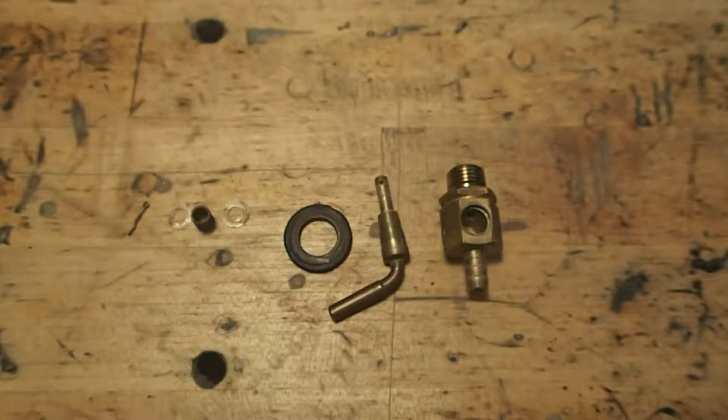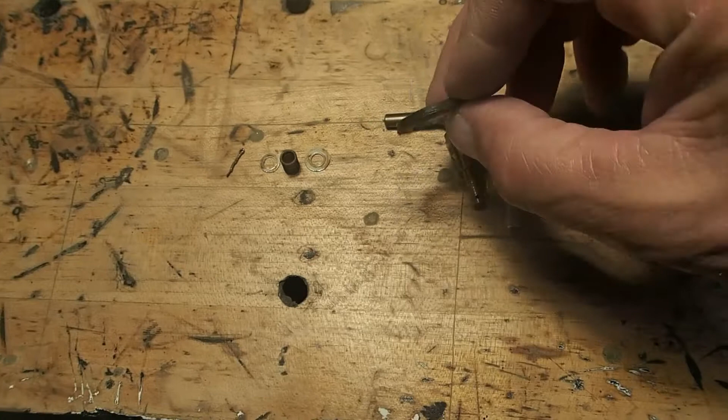I'm at this point where I've pulled the petcock out, or one of them. They both need replaced, they're both leaking right where this piece goes in, and there's no rubber seal there at all, just brass on brass it looks like. This washer is fine, it's not leaking, it's just leaking out of here.

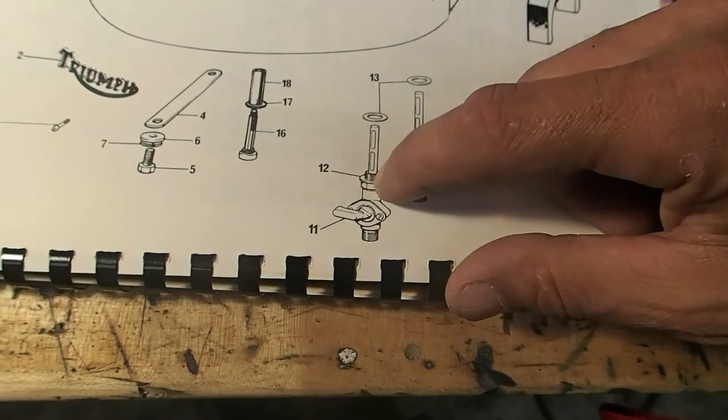So I'm trying to find a replacement for this and not having any luck, mainly because this threaded end goes into the tank, and then this hose adapter goes into the carb. Well, in the manual, the parts have the same thing, thread adapters going up into the tank, but they also have threads on the bottom. Everything I've found online so far has threads on the bottom, not the hose adapter.

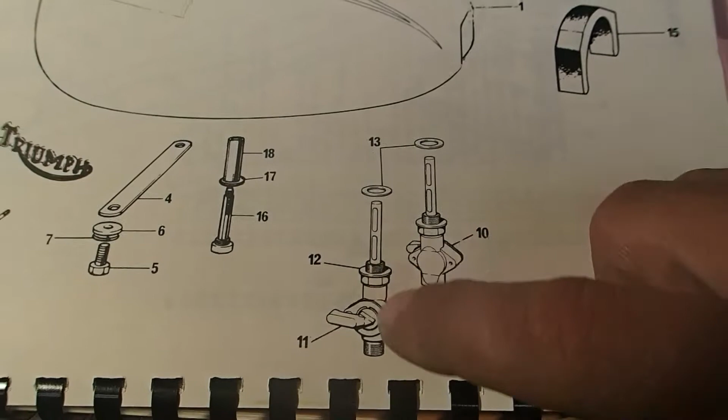I'm not quite sure what to do. I've looked around and found one set that actually had threads on the top and a hose adapter on the bottom, but it had a big nut that covered up the threads, so it looked like it screwed onto something already threaded on the gas tank - exterior threads instead of interior threads like this one. It was basically the reverse, like it screwed up onto something.

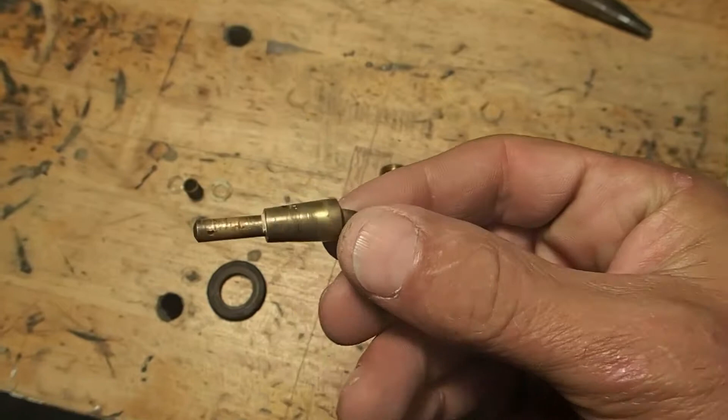So I'm having trouble figuring out what to do because I don't know. I mean, they're just bad. You can see they're all marked up and scarred up, and that's why they're leaking, obviously.

Do I take sandpaper to them and try to smooth them out maybe? I may be able to get that one pretty easily, but I don't think I'd ever be able to get the inside of this smoothed out well.

So I don't know, I'm in a quandary, and I'm doing some research right now on the web. I've already asked T140d.com and we'll see what they say. But yeah, I just don't know what petcocks to get. I need to buy them - that's my next step, is to replace these.

There's two on the T140. There's a primary, which is the one I just took off, on the left hand side of the bike, and then there's also one on the right hand side, which is a reserve, and they look identical. So there wasn't a reason for me to pull both off - they're both leaking in the same place.

So if you can see, this is all - I've disassembled the entire petcock. This is the cotter pin that goes in the end of this, into that little hole right there. Then the washer goes on.

Let me see if I can just assemble it for you real quick, maybe that'll be easier. So this goes in here, then you put the big washer on, then your spring, then your little washer, and then the cotter pin will go in that hole there.

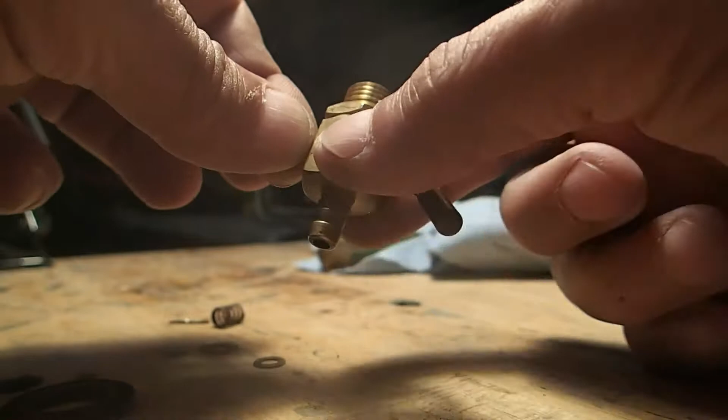So that basically keeps tension on it and pulls it this way and keeps it together. It kind of pulls this way and the centerpiece this way, kind of like this. And that's supposed to keep it sealed.

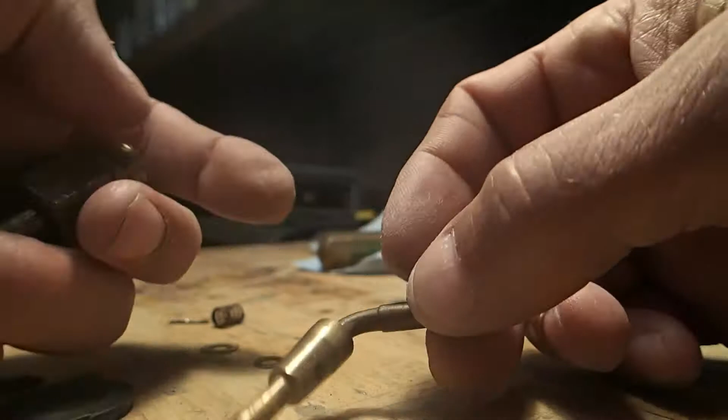Well, just look at that - you can tell it's not sealing well at all. You can see nicks in it and everything. And then the washer goes here up against the gas tank, kind of like that.

So yeah, that's what I'm working on now - I don't have a way to tell which petcock... anyway, I'm trying to figure out which petcocks to get.

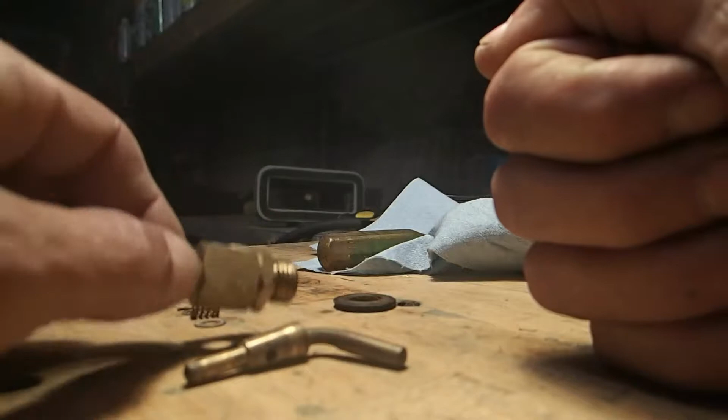So if anybody has any ideas or suggestions, please let me know, because these are not good. I can't ride the bike like this. I did today, but I was leaking gas everywhere, so I don't want to be doing that forever. So I need new petcocks.

Remember, this is the one that they said it needed, and as you can see, it's got threads at the bottom and threads at the top. So that's not these, which is the one I took off.

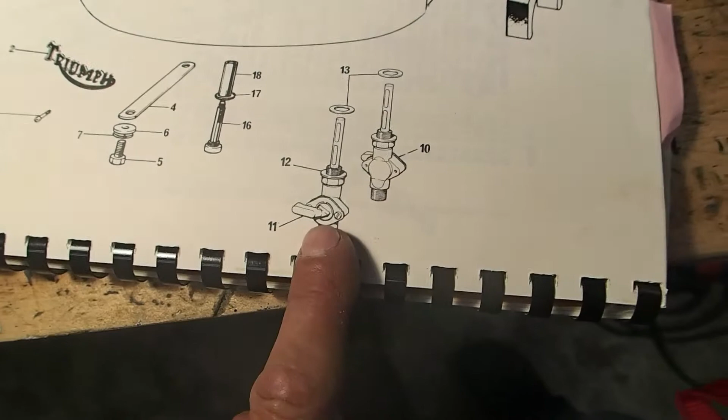I don't know if they're original, if somebody took the originals off and put these on or not, but all I know is these are leaking. They don't match what this says should be the original, and I would love to have that filter. See, this one even has a filter on it, and this one doesn't. So I would love to have that filter.

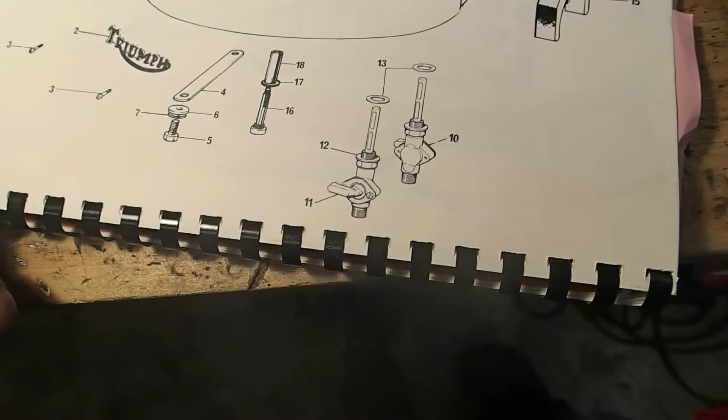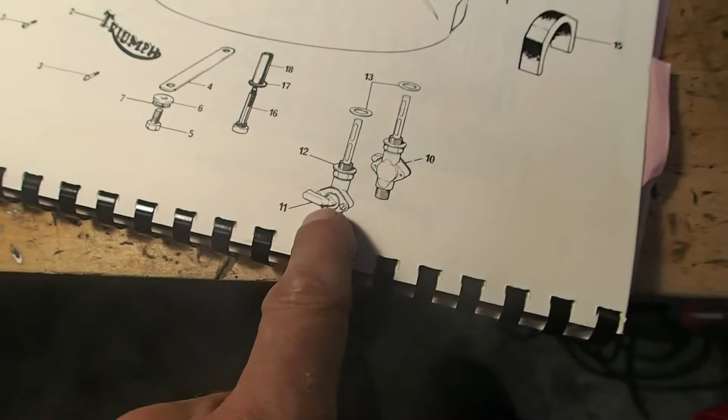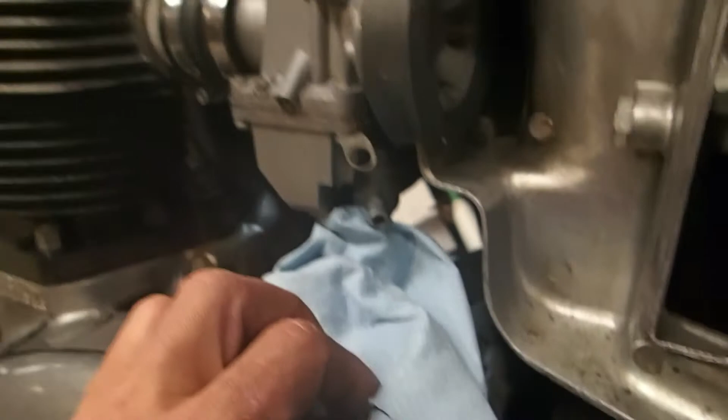So yeah, let me know, what did you guys do? And if this is threaded, if the right one I need is threaded, what do I use to go over to the carburetor? Because on the carbs, it's just a simple plug-in. So is there some adapter that I'm missing or something? I don't know, you guys tell me if you know. I'm going to keep researching, but so far I haven't found anything.

Yeah, I don't know, I'm in a quandary right now. But that's the petcock torn apart.